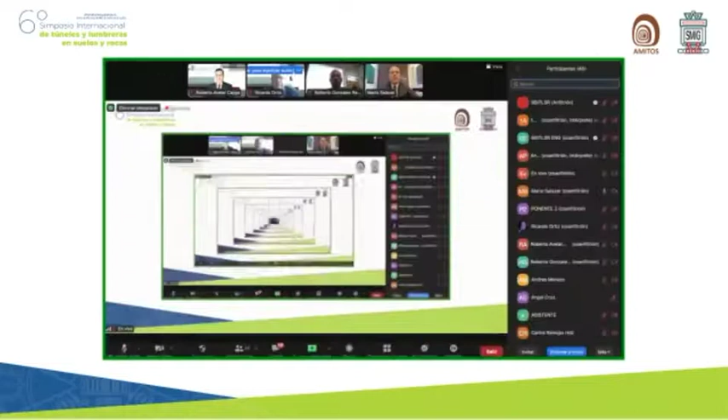the great experience of different colleagues from different countries give us in our task. Thanks to technology, this will give us the opportunity to listen from anywhere in the world to experts in these topics who will share with us their experience and knowledge about international projects, study cases, and the use of underground spaces. Young engineers will also give us their scope and experience, which will allow us to strengthen our activity and also to find tools in order to face the challenges and uncertainties that we have in the development

of our professions. Our work demands us to be updated, and of the quality and accurate execution of our work, and this depends on the expertise of many people. Undoubtedly, all of us are interested in knowing more and in contributing to projects that will benefit society with technology. On behalf of Amitos, I thank the speakers who are very generous to share with us their time and their expertise.

I also thank the Mexican Association of Geotechnical Engineering and its chairman, Dr. Roberto Avelar Cajiga, as well as other organizations for their work in the 6th International Symposium on Tunnels and Shafts in Soils and Rocks. I welcome you very warmly with the certainty that this symposium will achieve the goals that we have. Have a good day and a very fruitful symposium. Thank you.

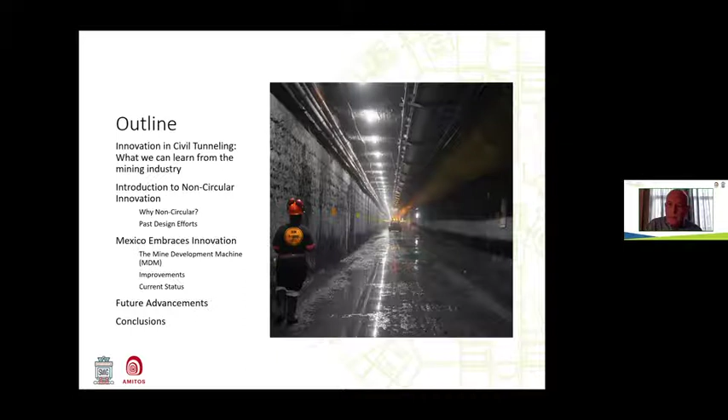In civil construction, innovation is different. The main reason innovation is different in civil is that, although there's been a lot of innovation over the years, on a civil project the contractual arrangement is usually a municipality that needs a tunnel done. It's mostly a one-project tunnel, not there for years. The owner doesn't want to take much risk—he's responsible really to the citizens, it's a city—so he doesn't want to get involved with much risk. And since it's only one project, he isn't so keen on trying to innovate.

That unfortunately is the fact. So innovations come about in civil mainly because we get into trouble and have to come up with something new. That was demonstrated in Emisor Oriente in Mexico City when we had those machines and not enough geological data, and quite a bit of innovation went on. The client was very obliging to help us with that innovation—us meaning the contractors, the TBM suppliers. There were a couple of us TBM suppliers down there, and innovation went on on both of those projects.

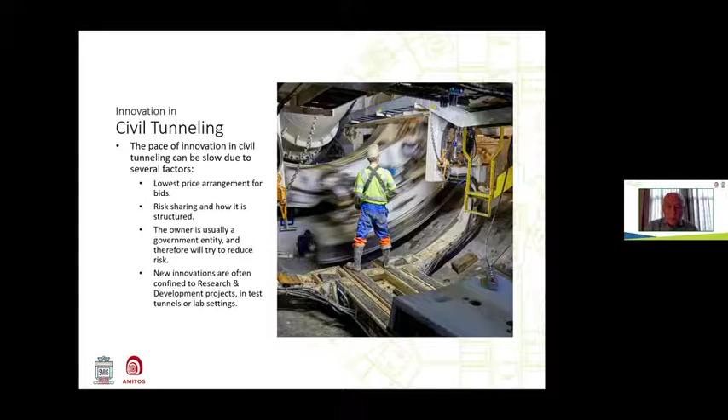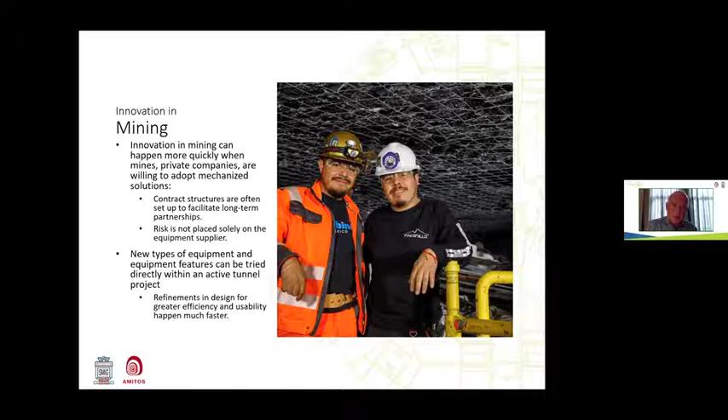In mining, it's quite different. The mine has a really long-term outlook in what they're trying to do. They're going to buy the MDM 5000 and operate it for the next 10 years. What they're looking for is a 5 or 10 year window, not just that one project. They want to get to their ore body faster and be able to access it more quickly. So they're very much interested in improving the technology. It's different between civil and mining.

I'll give you a couple of examples of what we've done in mining. This is an access tunnel to a coal mine where we bored a decline. It's a mine in Australia, 8 meters diameter.

In this case we used some of the technology we learned in Emisor Oriente for this mine application. It started out from surface, went down a grade of 1 in 6, well, there were two grades, 1 in 8 and 1 in 6. It bored down starting in soils and some water formations, then into mixed face, then into final rock, and then through some coal seams down to the main coal seam.

And no one had ever done this before, in terms of starting from soil, going into rock, and down to the coal seam at an angle, where they were going to set up longwall miners.

In this case, the mine was Anglo-American, and they actually bought the machine from us. We negotiated the specs with Anglo and some consultants, but they purchased it, came right out and bought the machine. Then they hired a contractor to operate it, an experienced contractor that had some TBM experience, not much. So the financial arrangement was somewhat complicated, but the mines are used to that.

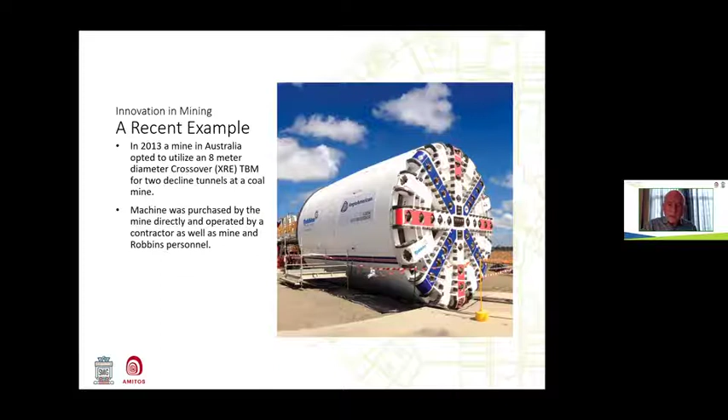This machine bored the decline, and it was also kind of unique because it was something the miners had never seen before. Most civil contractors were pretty used to these segments, and the mine was delighted to have a nice lined tunnel for once.

It's expensive, but they're going to be here for 50 years, so they don't mind putting in an expensive tunnel. What happened is the machine bored down, we left the outer skins in the tunnel, and walked the machine back out using a walking device we made, then moved it over and bored the second tunnel.

We had some problems in the beginning, like everything else when you try to innovate, but we sorted them out within weeks, I would say. It also had to be explosion proof. Then they just put this concrete floor in afterwards, and that's their access tunnel. They drive vehicles in and out of it. So it was an interesting process and an example of good cooperation.

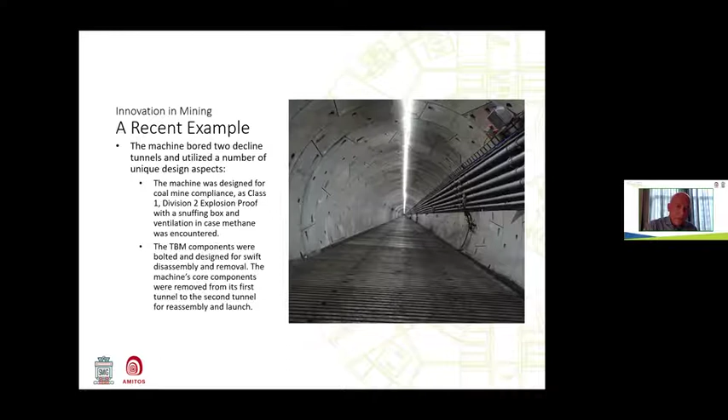The project finished ahead of schedule, actually, which is a little unusual when you're putting in innovation, but it finished somewhat ahead of schedule. They said it was 14 times faster than if they'd gone and done this with a roadheader.

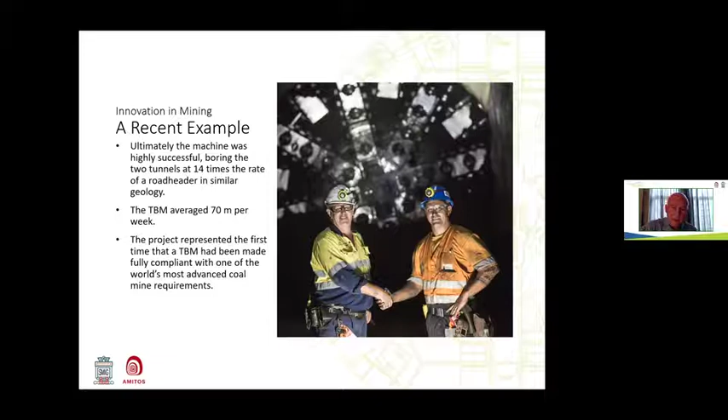To a mine, that means a lot. That means you get to the ore body, you get your coal sooner, and there's tremendous development cost, I don't know the exact number, but there's probably a billion dollars in development work before they get their first ton of coal. So the sooner they start to produce coal, the sooner they get payback on their investment. It's very important to have fast access to any ore body, and the mines understand that, and they're willing to take some risk to do that.

This mine development machine we got, this non-circular machine, the MDM, is at the Fresnillo mine, and it's underground, I think about 650 meters underground. We had to take it down the ramp and assemble it underground.

What they're looking for is a parallel access to the long continuous vein they have, and they want to mine out along the vein faster than they can with drill and blast. So that was the requirement, and that's where we started from.

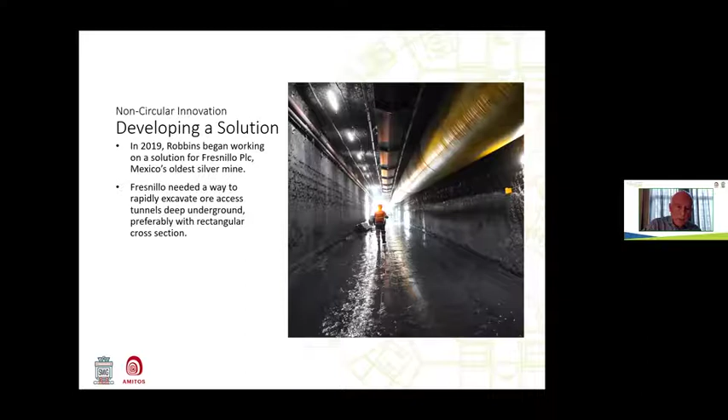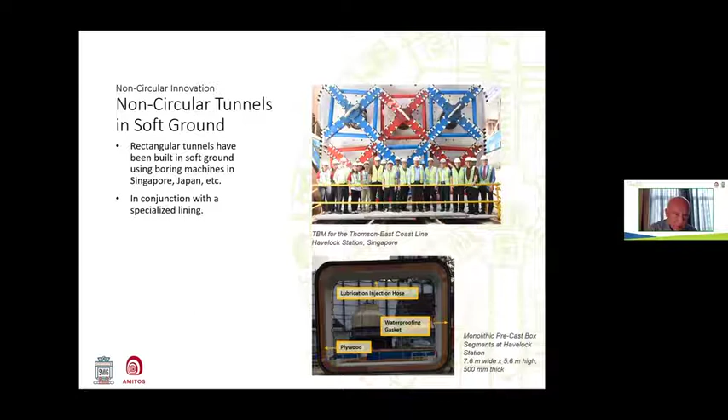You actually push the shield forward with jacks, just like you do with a single shield. But because it's clay or soil, you can finish the cut by just pushing the shield into the clay and ending up with effectively a rectangular square tunnel. There's complications, as you saw in the lower one, how you put your segments in, but that's been done and been done successfully.

In our case, we don't have the luxury of pushing the shield through the rock. You have to actually cut out the square.

The reason they want a flat bottom in the mine is there's probably in Fresnillo 20 different vehicles used in their mining operations. There's everything from service trucks for their industries to haul trucks to front end loaders, drill jumbos, everything going on in this mine. And so it's very important to have a flat, good floor.

And yeah, they respect mechanical excavation, but they respect that flat floor a lot more and look for that. So in drill and blast, it's just sequential. I would say it's more dangerous. It's just not as fast as we can mechanically excavate.

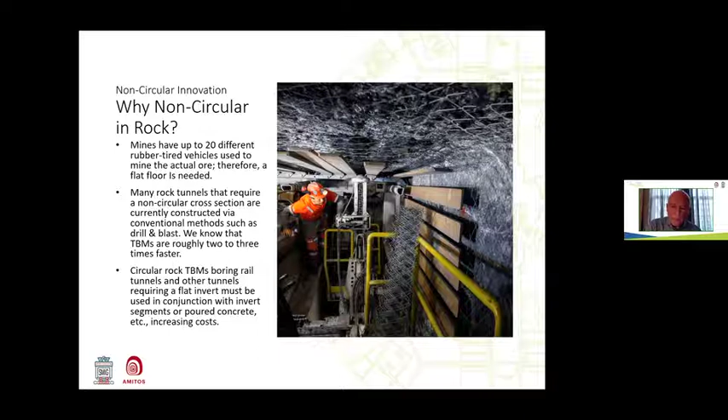And here, of course, we could bore a round tunnel and put an invert in, but as this diagram shows, you end up with nearly 50% more muck to get the same operating window. And that in a civil project, maybe that's not so bad. But in a mine where you're 650 meters underground and you got to get rid of every ton of ore, haul it out to the shaft, hoist it up the shaft, 50% more volume is a big deal.

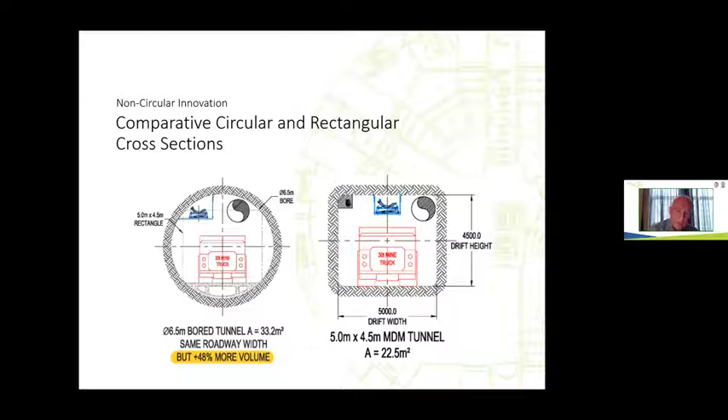There's been quite a few attempts over time to look at how to excavate hard rock in non-circular. And as you can see here, there's been a number of attempts, and some of them worked out, nearly worked out, others didn't work out at all.

And the most successful ones are the ones done with road headers, but road headers, like the top photo, have their limit in terms of hard rocks. Certainly, even in some rock at 50 MPa, they start to run up against advanced problems - too much pick consumption, other problems. But at 100 MPa rock, they're essentially stopped. It is very rare, even with the most high-tech modern road header, that it can effectively operate in 150 MPa rock. It just doesn't happen. So that's the biggest use of underground mechanical excavation - road headers.

There's been attempts by different companies in the last 20 years to go non-circular using oscillating cutters, vibrating cutters, undercut principles, mini discs. I won't go into all the different ones here, but you can see this one below, the yellow one - that's sort of a combination of an oscillating cutter and an undercut principle, which has been around for 40 years, which hasn't proven up so well.

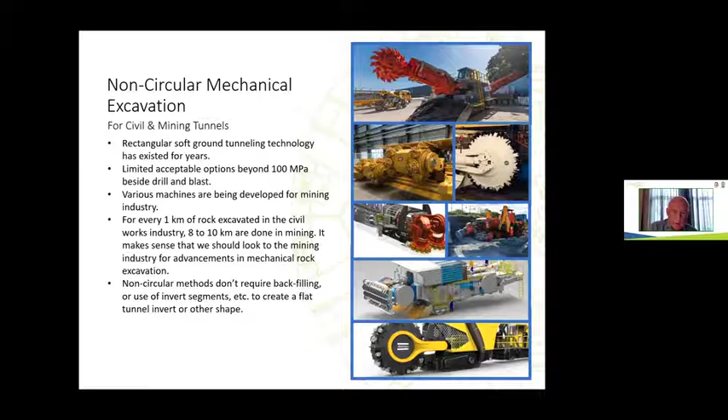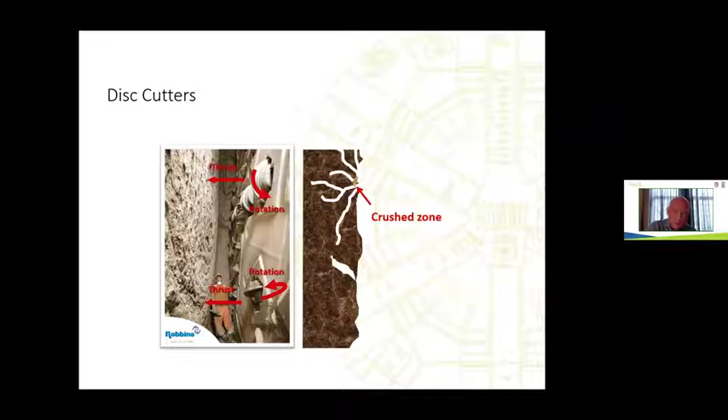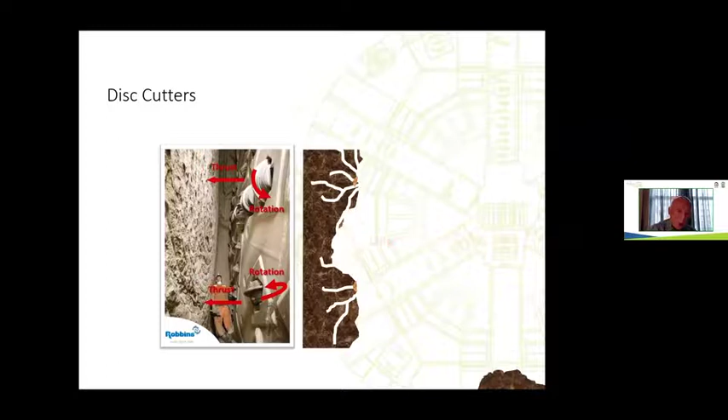But anyway, the photo demonstrates fairly well the grooves that you cut. And the photo on the right here shows how this cutter works. The cutter makes these big cracks in the rock and just rotates around, keeping these cracks going. We keep this spacing usually about 75 to 100 millimeters. And the trick is to stay in the same groove all the time. We use that principle in the MDM.

It actually stays, the disc cutters are always in the same groove, cutting and recutting the same groove as it is in a round TBM.

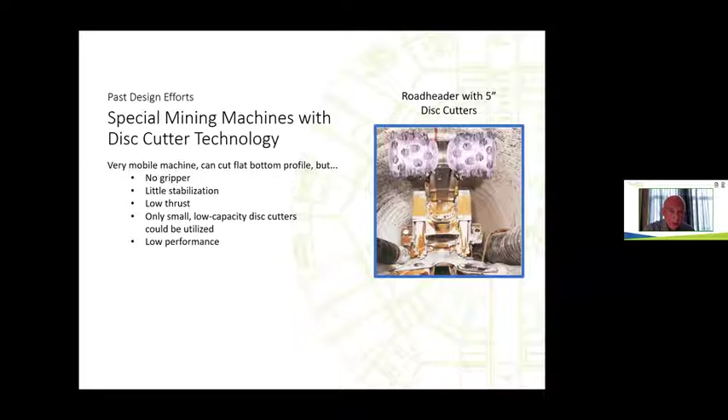There's been attempts to use disc cutters on roadheader type machines. This is an example of one, with sort of mini discs on a roadheader. But the problem with that is you come up against the limits of what you can excavate, because the discs are so small, you can only get a small bearing in them, and therefore you can't put the big loads you need into the face to cut hard rock.

And then you have the added distinction that if you look at the comparison between the 5-inch disc, or the 125 millimeter disc, and the 17-inch cutter, you can see the big wear difference. What you do in a disc cutter is wear down the steel until it gets to the bottom of the shape of the disc, and then you have to change it. So if you have a really small diameter cutter, that wears out very fast. There's probably 25 times as much wear volume in that 17-inch cutter as in that 5-inch cutter. So you can see why the principle of using mini discs didn't work out so well.

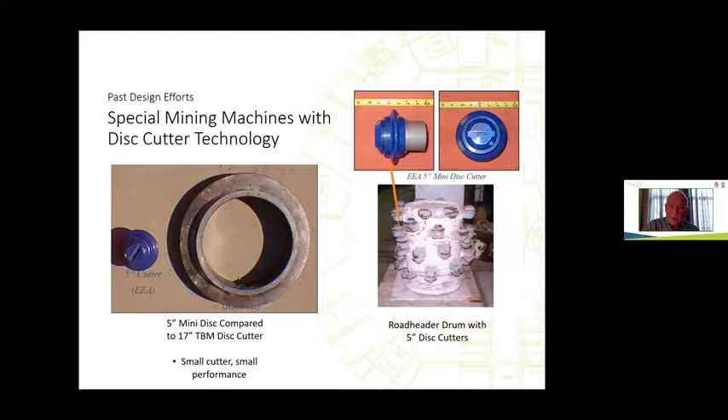So you not only swung vertically and then made a cut, then you moved out the arms. And between moving out the arms and swinging vertically, it was kind of a slow cut. These tunnels were used for sewers mainly. So it was concluded that round was just as good, you didn't get a great advantage off the non-circular tunnel, and round was really efficient. So the industry, Atlas Copco made some of these similar machines, and the industry just kind of gave up on it and went round for sewers.

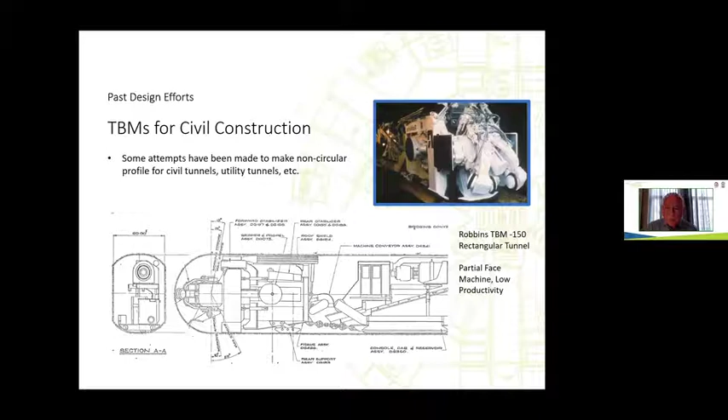Robbins' big attempt about 15 or 20 years ago was the mobile miner, where we had a big rotating drum out front with cutters mounted all around. We built 3 of these machines, and one we used in a civil project in Japan, and 2 of them we put into mines.

We had medium success with it, but it wasn't very effective, there were 2 or 3 things wrong with the cutting principle. The cutter head, of course, the drum rotated and the cutter head swung from left to right or right to left, but it didn't stay in the same groove, which made it inefficient cutting. The other problem with these types of machine is the cutting force right out here on the left-hand side, where the cutters enter the rock, is a long way from the force reaction system, the grippers, which you can see 2/3 of the way back. Because of that, you have a sort of an unstable cutting system, and you need some very heavy beams and structures to react that load.

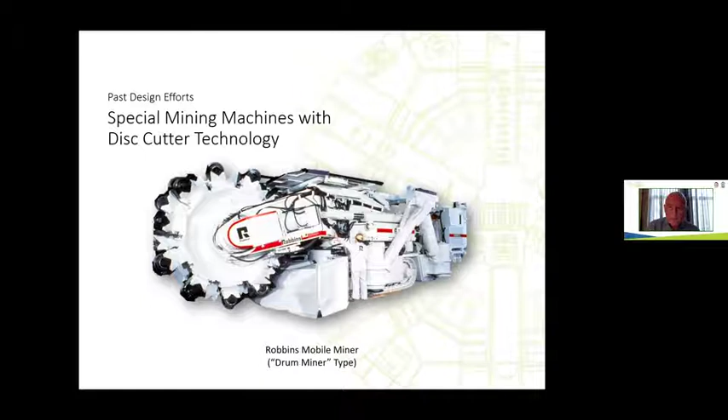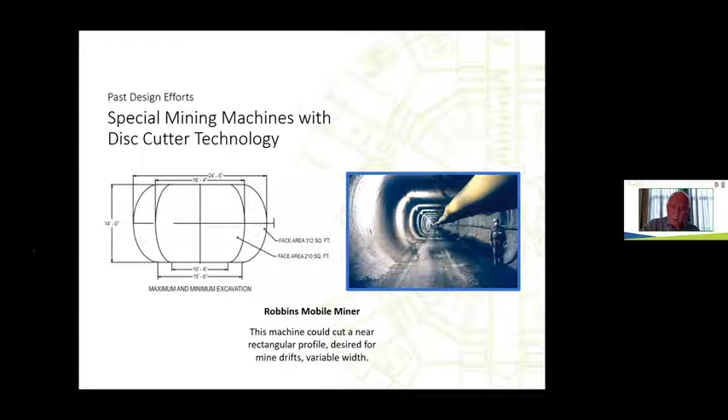And this was not a critical tunnel, so they kind of gave up on it. This thing had potential, but they just gave up, and not much work was done by our company or other companies for 20 years after this to go non-mobile. Now there's a revival of mechanical mining companies wanting these mobile miners.

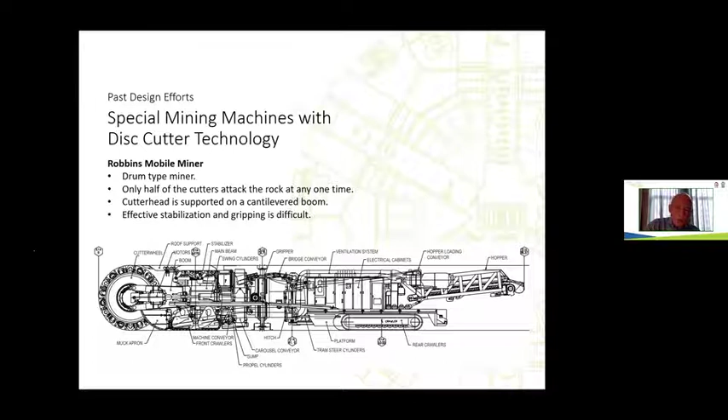This is just a cross section of the machine with a cutting wheel, and it was somewhat mobile. We called it the mobile miner, but it is about as mobile as a D8 Caterpillar. Not exactly mobile, but we did have crawlers under it, and you could back it up and go forward. But you couldn't turn a 50-meter radius like the mines want, or a 10-meter radius, which they'd prefer. So it was semi-mobile.

A little on the mine development machine that we've got operating in Fresnillo. This is called the MDM. We assembled it in our workshops in Ohio. It was designed to cut rock up to 200 MPa, and to cut a 4.5 to 5 meter drift.

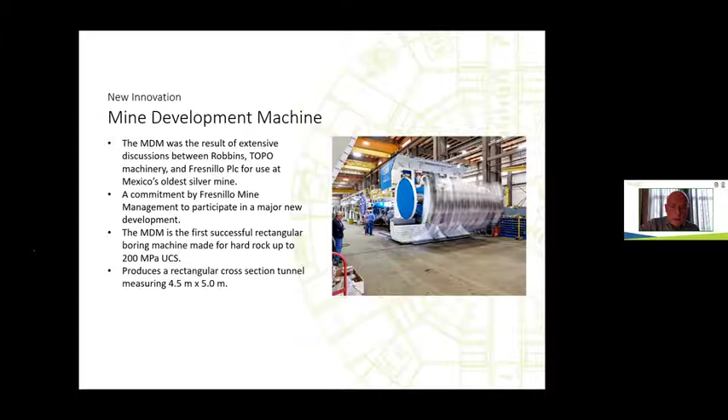How it works is it's a full dress of cutters. These are double disc cutters, but the double discs are there so we can get the spacing we want and acceptable bearing capacity within that cutter. They're 18-inch cutters, and they stay in the same groove.

What we're doing is swinging that cutter head up and down. In most cases we don't do full swings, we're trying to stay buried in the rock as much as possible. So we'll do a series of center swings, then some gauge swings, then center swings and gauge swings, full swings of 180 or more. Because you have to sweep and get the last cutters out of the pattern, you end up with not a 180-degree swing but more like a 220-degree swing, because you've got to get your gauge cutters out of the cut to keep the profile you're looking for.

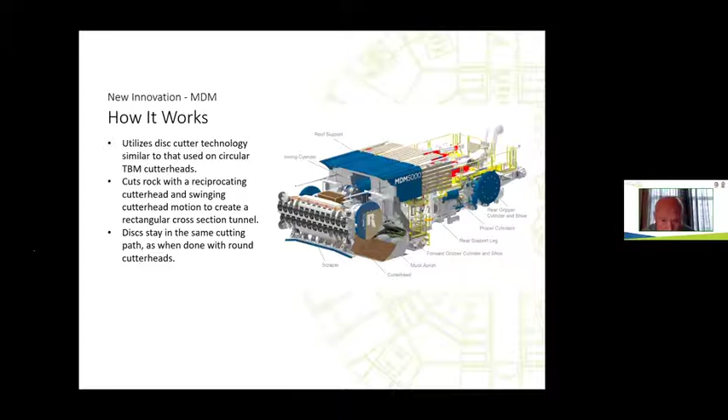We're also experimenting - you can see we've got rear grippers on this machine set back farther, and we're experimenting with whether we're better off to slide the front gripper as we do in a main beam machine and push with the rear grippers, because we've got a much longer stroke. So we're working on trying to optimize the advance rates with this machine.

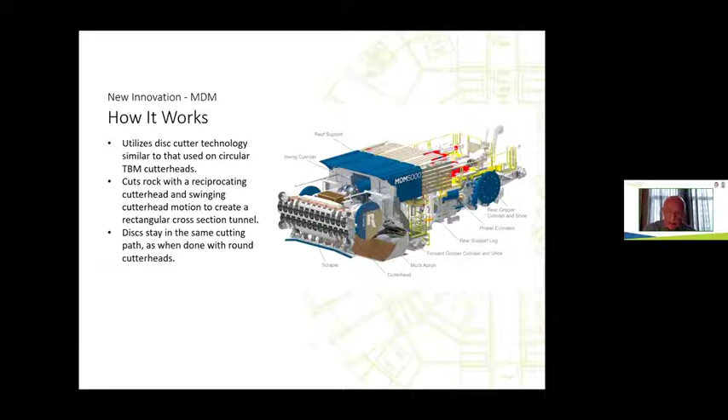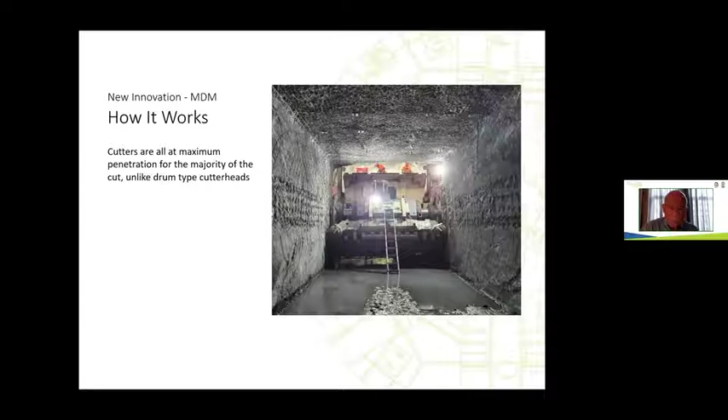This photo shows the ground support, and you can see where the gripper's gripped in. We're looking at the front of the machine. As this photo was taken they'd backed the machine up, so the cutter head is down and the roof shield is down. You can see the guys doing some work behind the roof shield. It's an interesting shot showing how the machine works, how the cutter head rises and lowers, and how we can back up and move forward. But we are gripping - we don't have a crawler under this machine when we're operating.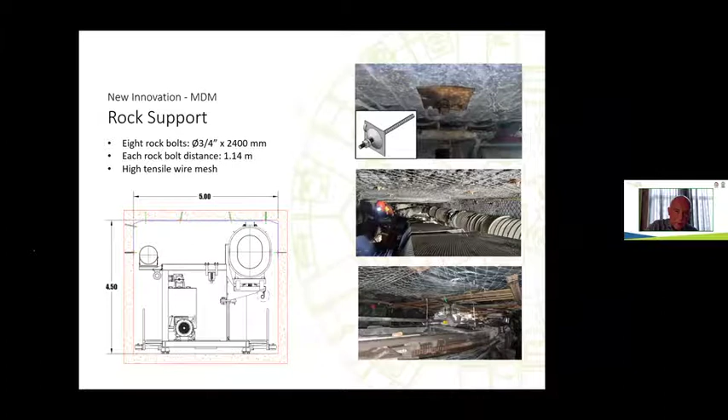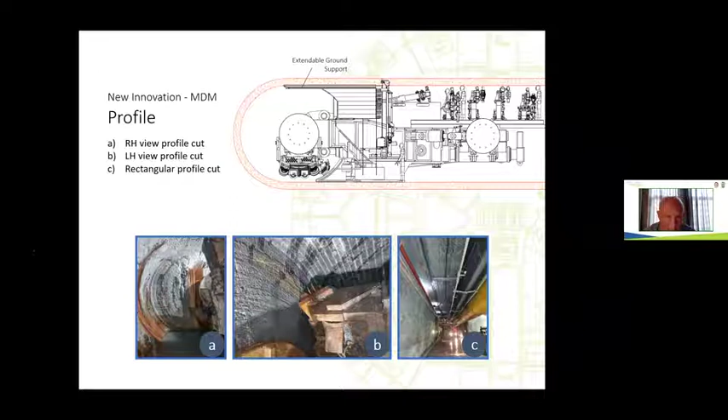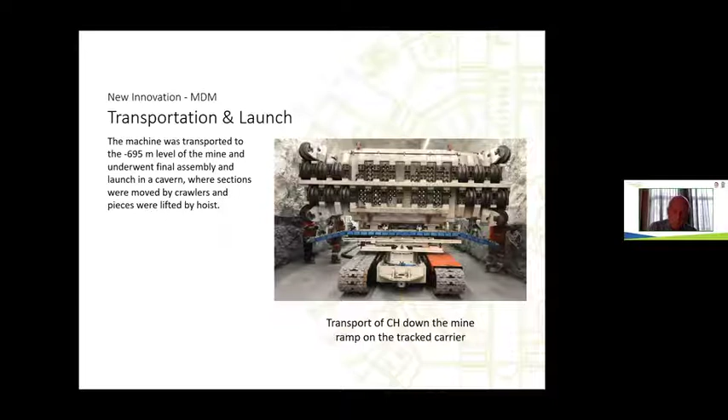We did take the machine down a ramp from surface underground, and we used crawlers to do that. This is the cutter head coming down and ending up at the machine. We took it down in about 15 different loads and assembled it underground. This is the underground assembly chamber where we put the machine together. It didn't require such a big underground chamber to assemble it, but we certainly needed the chamber to assemble the machine and get it operating.

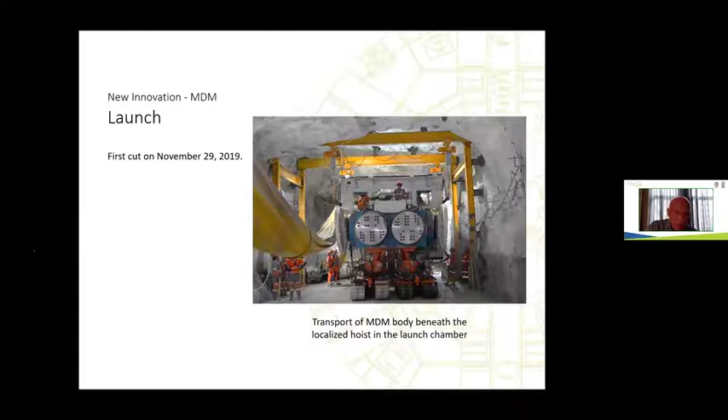What has gone right and what's gone wrong? We've had...

One of the problems, or errors, is that we were too aggressive on the gauge. We took a rectangular tunnel past the limit we should have, and we didn't have enough gauge coverage in our cutters. Looking back, we're going to extend that gauge out. You don't need that sharp gauge for a rectangular tunnel because the wheels on just about any vehicle are 250 millimeters or more in from the tunnel wall. So you don't need that tight of gauge. That was one of the oversights we made.

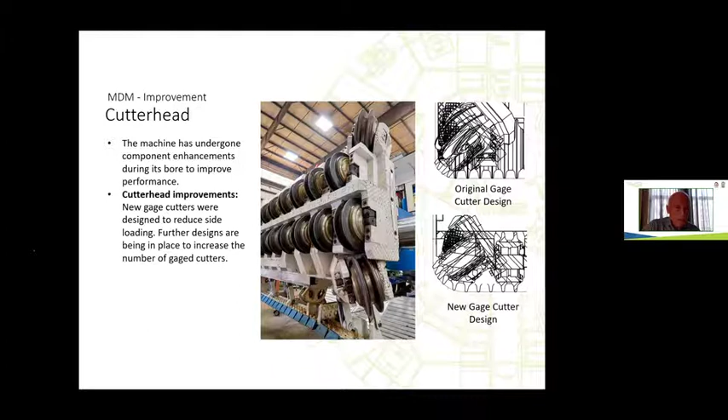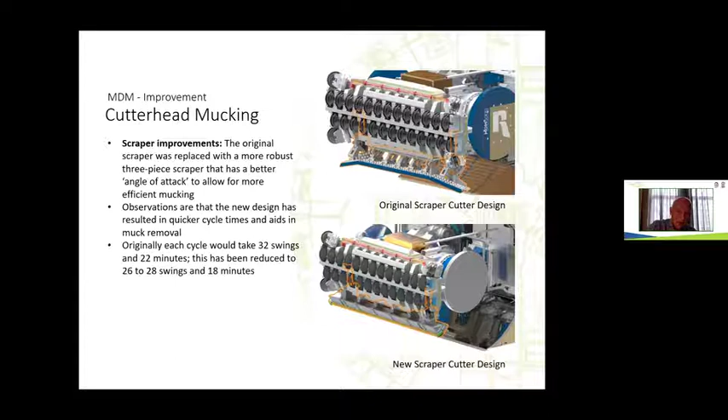We also had problems with the scraper. We didn't get that right. It wasn't heavy enough as we tried to swing and move it. So we had to revise the scraper, having it scrape into a rotator with gathering arms or gathering wheels, then put it on a chain conveyor. There were also problems with the chain conveyor we had to improve.

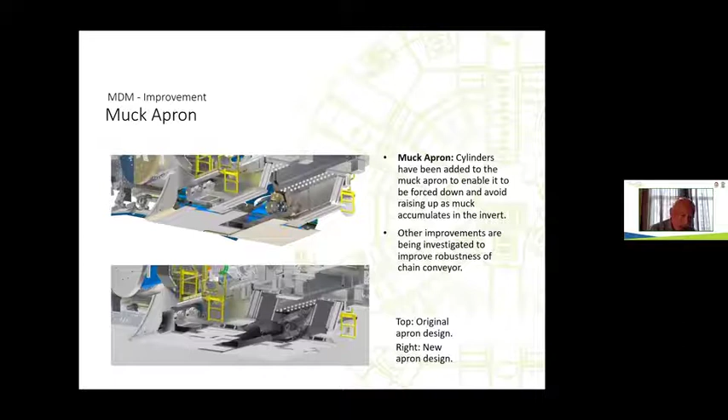We also hit some real soft ground, and the machine was effectively sinking, so we repaired the apron as well as extended the front shoe. We weren't without our problems, but the mine is real good to work with, and they understand that it's innovation and that improvements are required. So they give us respect and service and help us through this.

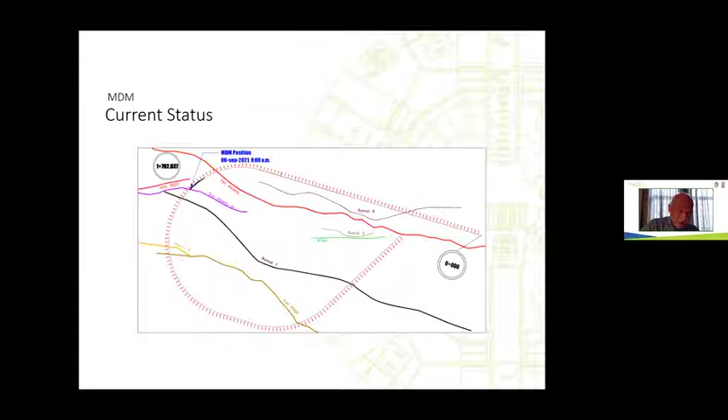So it's a question of getting your mining method right and going through it. This is a section where we started into this bad ground. You can see it started with a lot of water coming in.

Can you just start the video? Yeah.

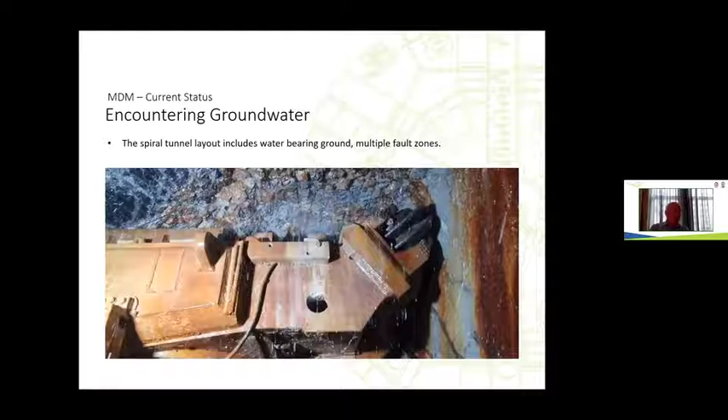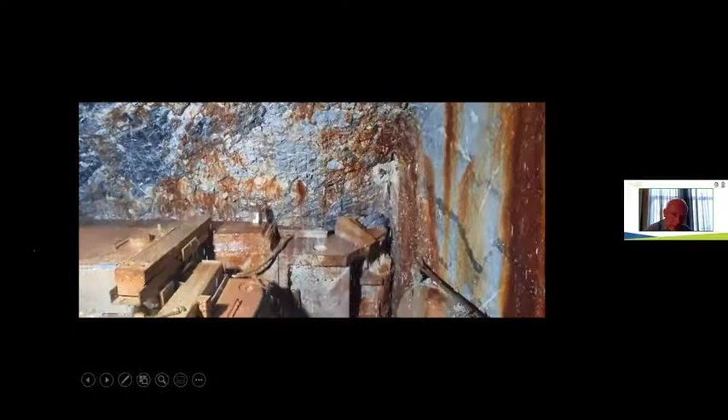This is water coming in, and this is the slowed-down cutting action. You can see the face fall because that cutter wasn't rolling when we first started it, and you can see where it starts to roll, but the face was falling out. Not a good scene when you've got a whole lot of water at 50 degrees C and the ground starts to ravel and come in on you. You know you're heading into troubled ground.

I think an error is that we weren't disciplined enough, the contractors, the operators, and us, to do enough probe drilling ahead and ground detection ahead, and we should have picked up more on this fault. We actually know better, but like everybody else, once you get some success, all you want to do is get more meters the next day, so you let down your guard, and I think that's what caught us here a little.

We still need to make some improvements on this machine. We have to really revise some of how we steer it and everything. That was interesting—although we've built a lot of machines and done a lot of non-circular work, even the steering, figuring out the correct way to steer without overloading the cutters and how to get good ground support, all these things were new to us. They're quite different than they are in a round tunnel.

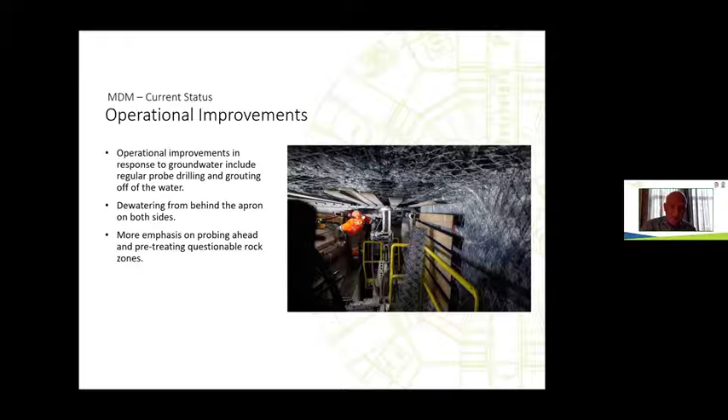But anyway, they've got a nice tunnel. They love this tunnel because they know where the wall is every meter. It's not rock broken, irregular rock surfaces. You can see there the tunnel conveyor running in the center of the picture up top. You can see the vent line and other service lines going in. And all this is happening as the machine is progressing.

We bored about 1,700 meters, and the best week we got was 52 meters, and the best month is 191 meters, which is for us in the tunneling world kind of not very fast production, but for the mining world it's double what they get. So yeah, you got to adjust your expectations, I guess.

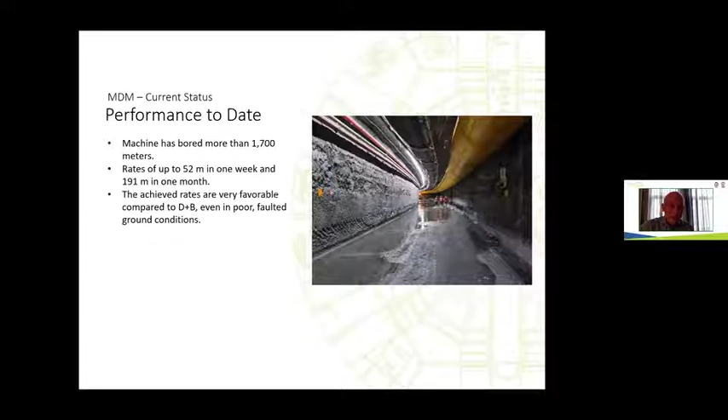What's going to happen in the future? What'll occur? The mines want more tighter turning radius. I think we can do that, but we will never get to what you can do with a drill jumbo and make those radius. We just won't get there if we're going to mechanically excavate rock, at least not in the foreseeable future.

I think we'll see more use of conveyors in mines. That'll happen. I think the mine planning has to adjust. They got to look at their mine a little differently. They need to get to their ore bodies fast, so we can help them with that. But the mines, I think, will look a little different as they start to move into more mechanical excavation of rock. I think our cost per ton of actually mining with a round TBM are in the same range as cost per ton for drill and blast.

So the mining industry is starting to see that, to understand that, hey, it's possible in some ore bodies to really excavate the ore body with a mining machine. Right now it's very specialized ore bodies, but I think we'll see a trend in that direction.

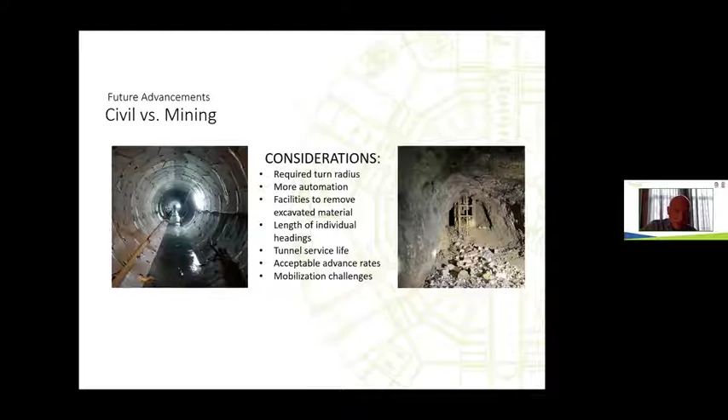What's going to happen in the tunnel? Well, one, we've of course done round for years, and we understand, we can predict the advance rates, we can predict the cutter costs. And the MDM, we're coming along, we'll make further improvements. But the MDM has another disadvantage other than not being so fast: it has a flat roof.

And again, I thank the Mexican mines for being tolerant. It's great to work with Fresnillo. It was great to work and do some of our development at Emisor Oriente, and so being associated with AMITOS and being associated with Mexico has helped further this development in the tunnel boring industry and in mechanical excavation. The Mexican tunneling and mining industry needs to be thanked for that. You've contributed. Thank you very much.